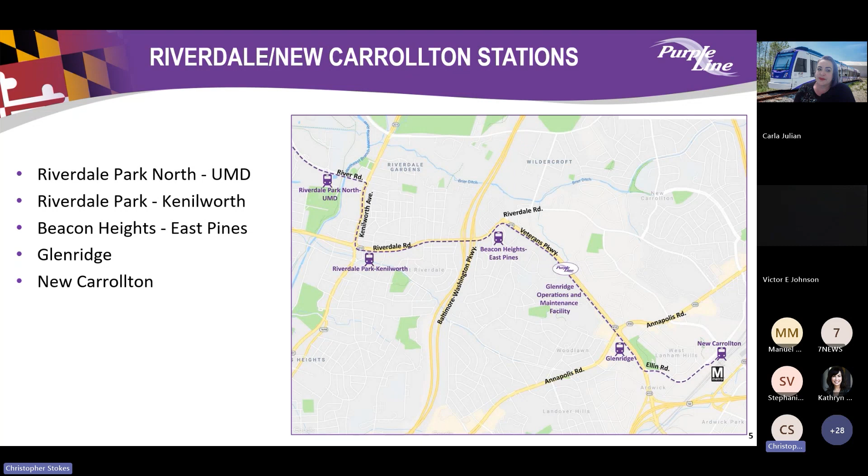So with that 16-mile alignment, each segment is in a different phase. You'll start to see that a few of these segments are at an exciting stage for us right now, with station canopies and track installation going into place.

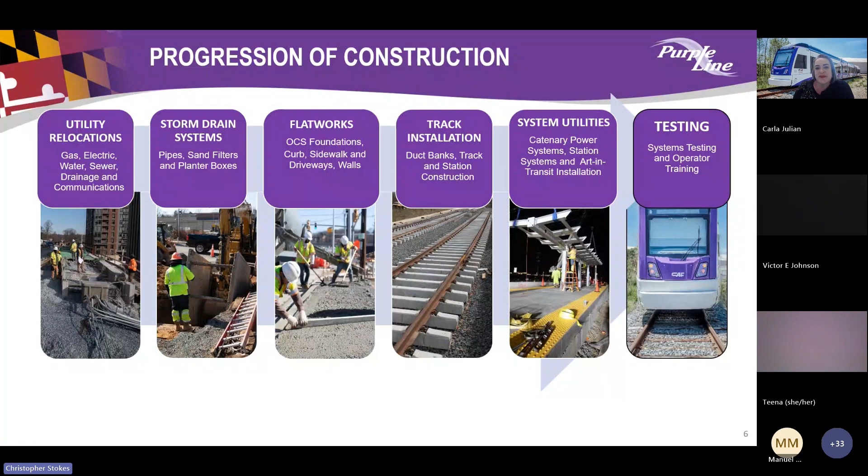Now you're going to see some of that progress as we show you our spring 2024 progress video featuring our project leadership team.

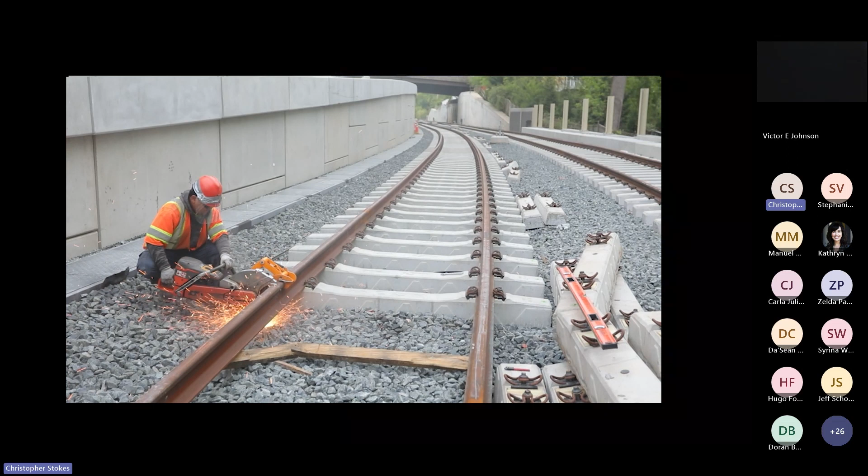Welcome to the latest update on the Purple Line project. This year, we've placed thousands of feet of track, an exciting example of tremendous progress being made by Purple Line crews. 2024 is set to be a year of momentum.

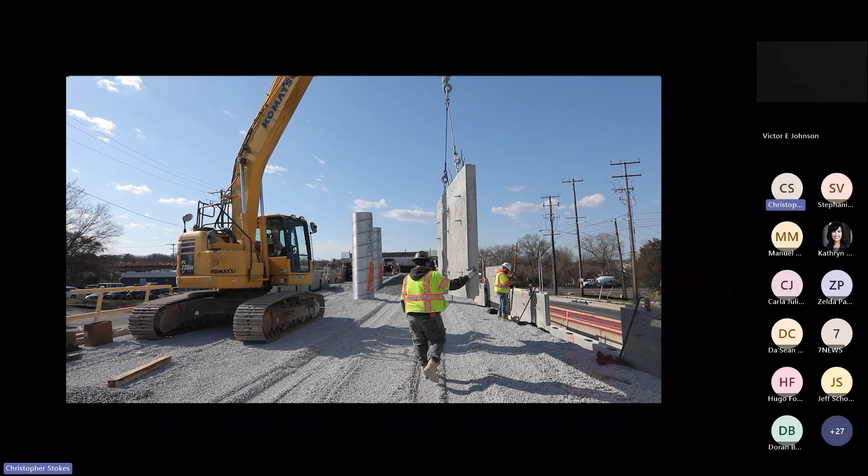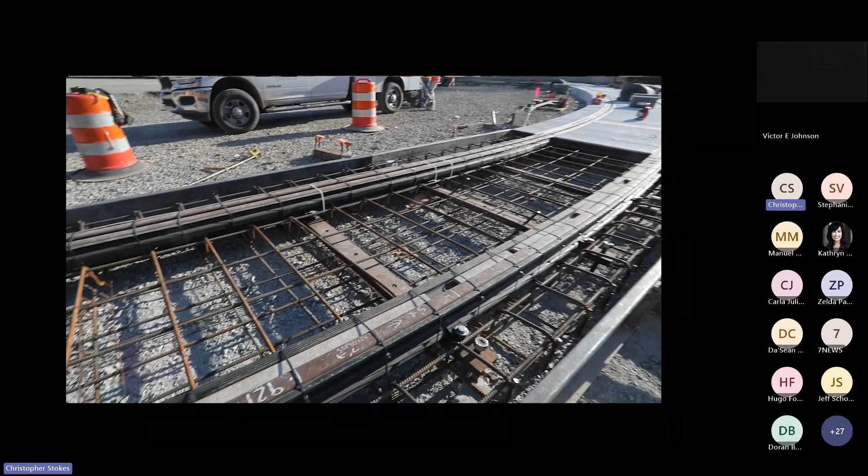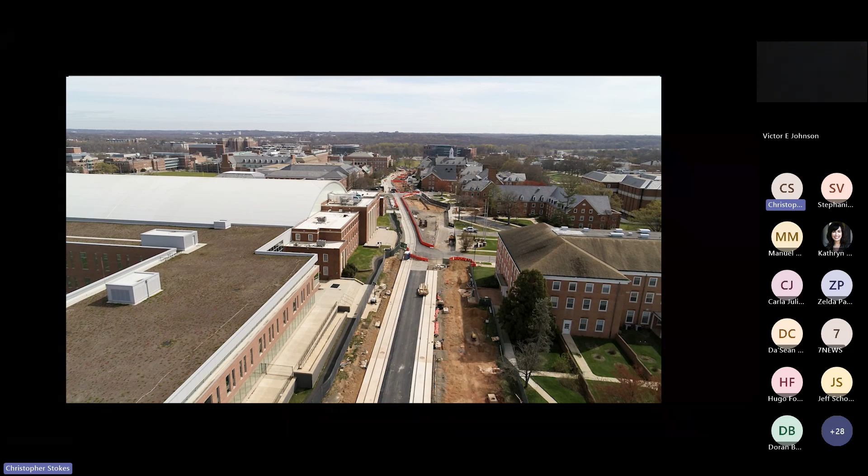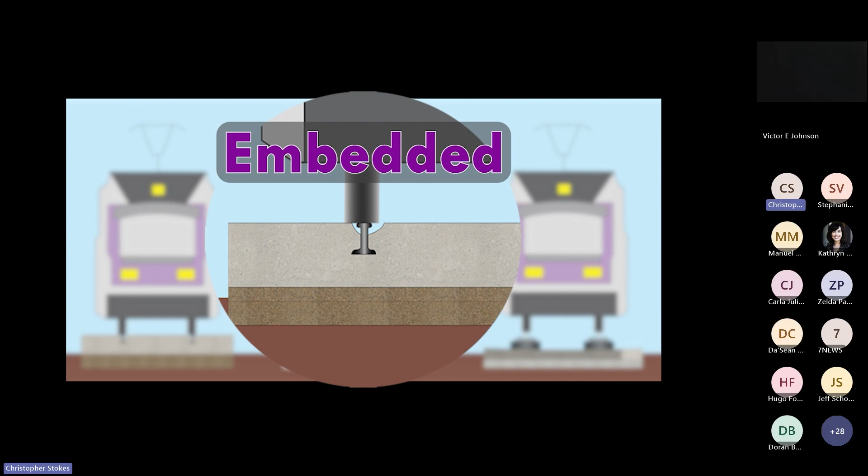The Purple Line track installation teams will be reaching even more areas. Already, tracks have been placed at the southern end of the project, along Ellin Road and Veterans Parkway, and throughout the University of Maryland. The track at Campus Drive is embedded track, seamlessly integrating into the road surface. The Purple Line boasts three main types of tracks: embedded, ballast track, and direct fixation. Each plays a crucial role in our mission to ensure a smooth journey from New Carrollton to Bethesda.

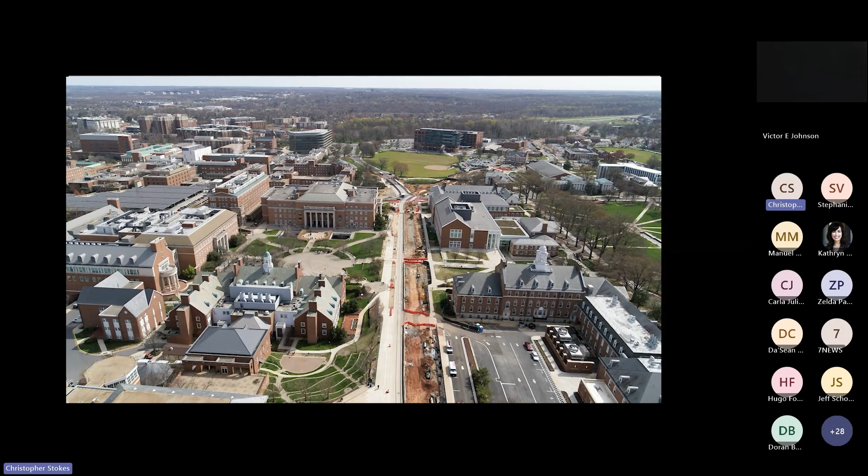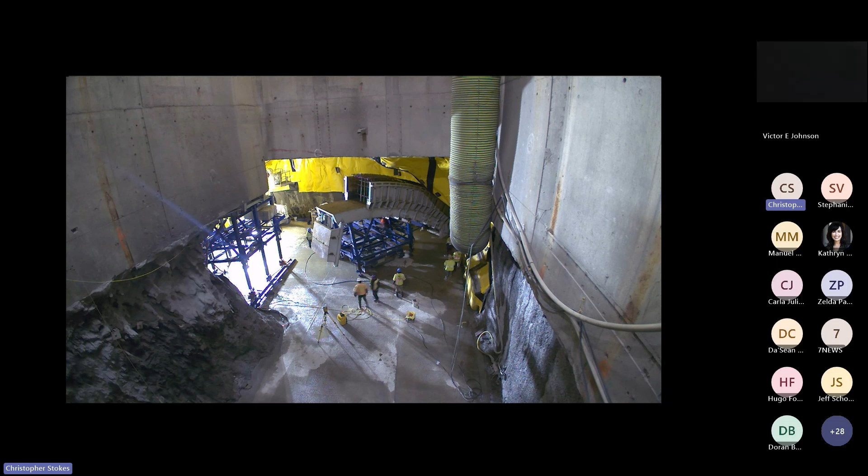Progress is visible along the whole 16-mile alignment. In Bethesda, crews have put the custom-made sprung arch form system to work to cast the first sections of the new cavern ceiling. The cavern will connect the 130-foot deep shaft to Metro's Bethesda station.

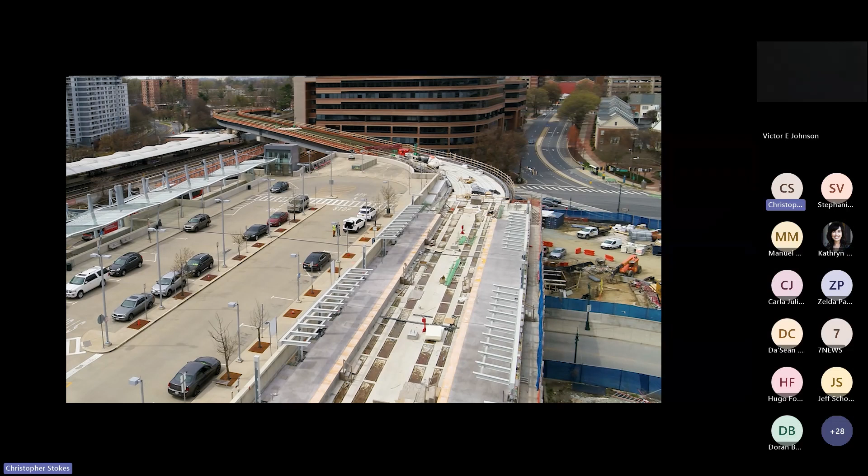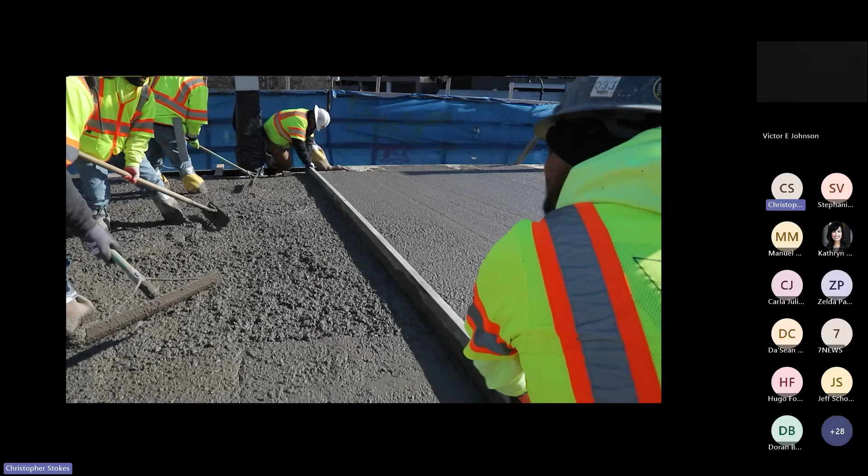In Silver Spring, the new Purple Line station is rapidly taking shape. From the installation of utilities to the erection of canopies, progress is evident at every turn. But Silver Spring is just one of the 14 stations underway. Station platforms are also emerging at key locations like Connecticut Avenue, Lyttonsville, Campus Drive at the University of Maryland, College Park, and Glenridge, among others.

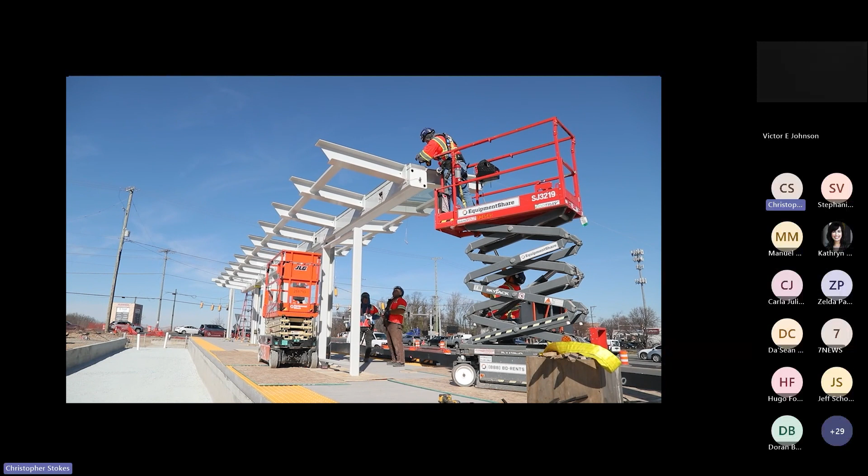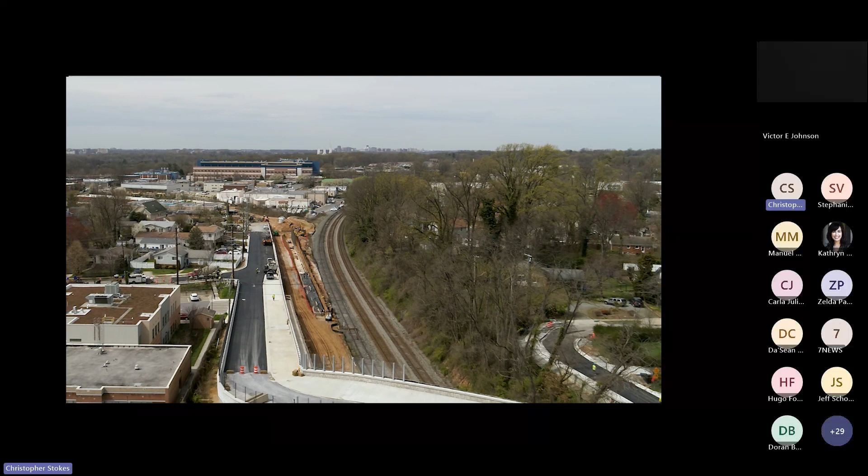In December, crews poured an impressive 720 cubic yards of concrete in one day to form the roof of the tunnel extension between Wayne Avenue and the Manchester Place station. We also finished the concrete, fencing, and paving needed to open the new and improved Talbot Avenue Bridge.

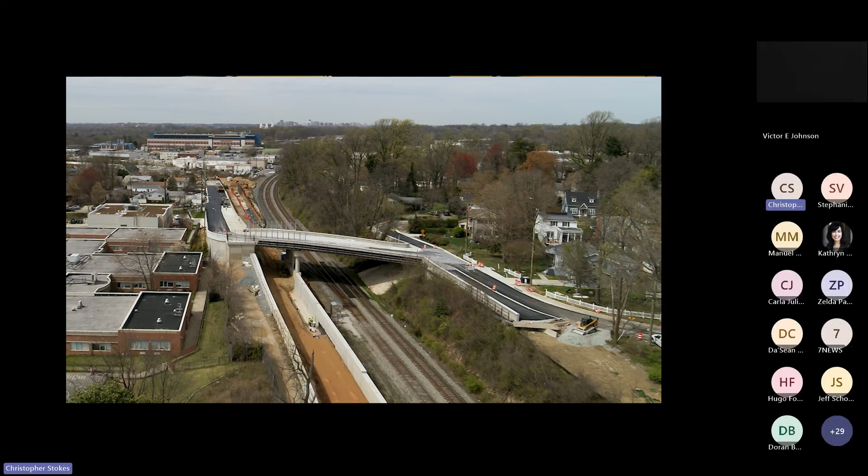This is part of the Capital Crescent Trail and an important connection for the communities of Woodside and Lyttonsville. In Prince George's County, the Kenilworth East-West Highway Flyover Bridge, which is made up of over 617 tons of steel, has been installed over this very busy intersection.

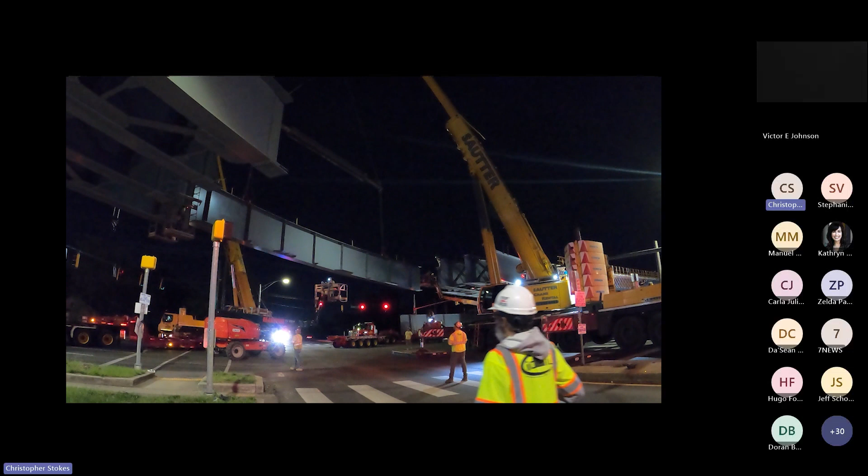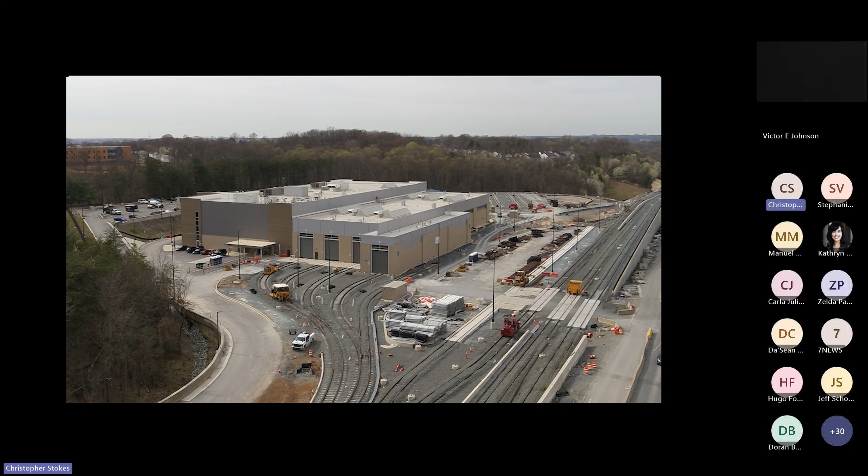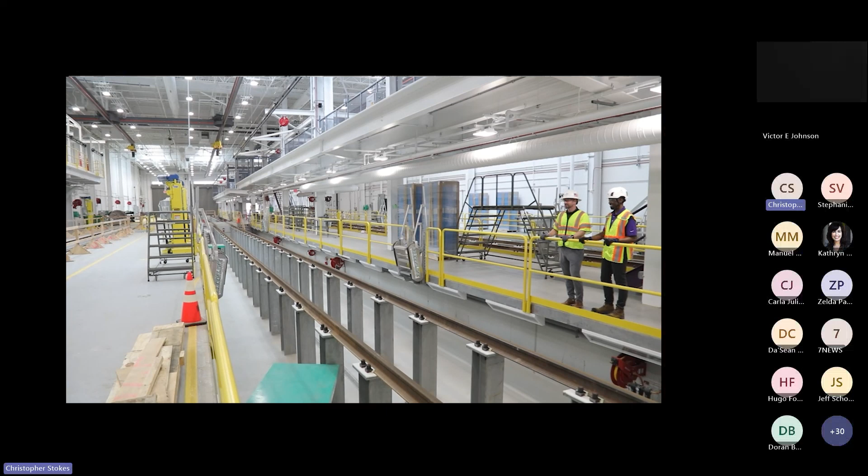In Glenridge, the Operations and Maintenance Facility prepares to be the heart of our operations. Here you'll find a variety of specialty track segments, essential for guiding our light rail vehicles as they navigate through the facility. Inside the OMF, state-of-the-art cranes and meticulously designed workspaces stand ready to handle everything from routine maintenance to major repairs.

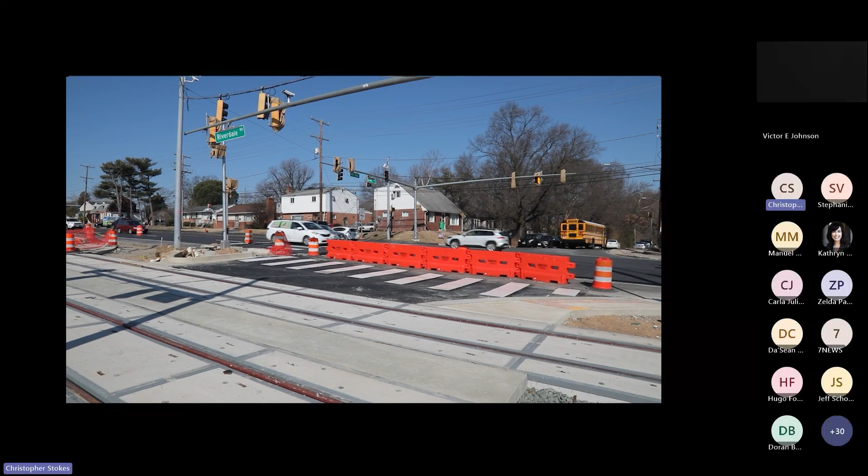While we celebrate these achievements, there is still much work ahead. As you can see, we have more visible tracks, stations taking shape, and complete bridges as a few of the Purple Line's most exciting milestones this year.

This time next year, you can expect to see the Purple Line light rail vehicles begin testing on the new test track located in Prince George's County.

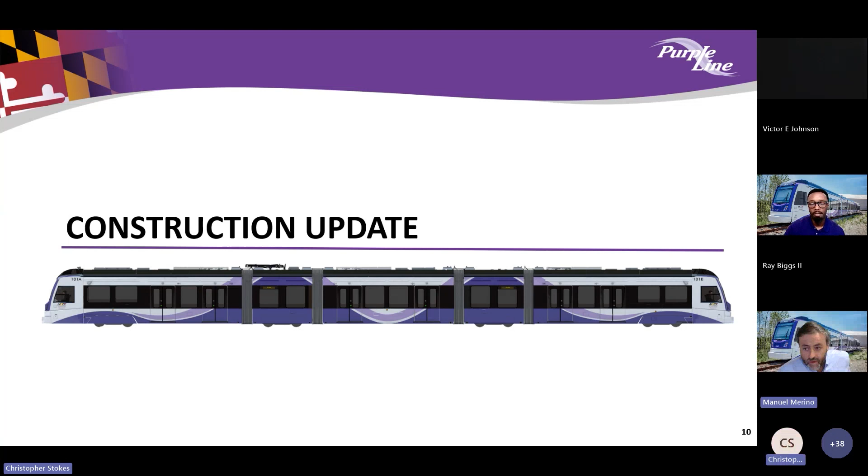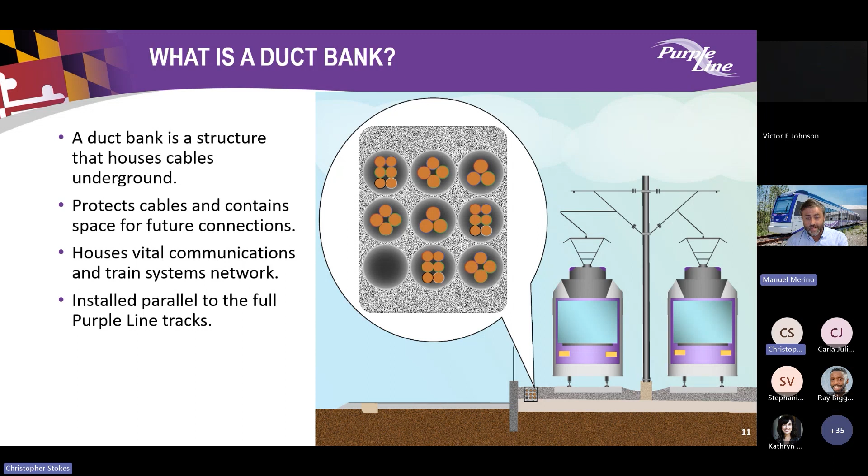We can go to the next slide. We're going to start on the Rivertech Court at River Road. We are working, installing different underground utilities. And what is going to come shortly is an implementation of a full closure during this summer with the intention of the full track installation across Rivertech.

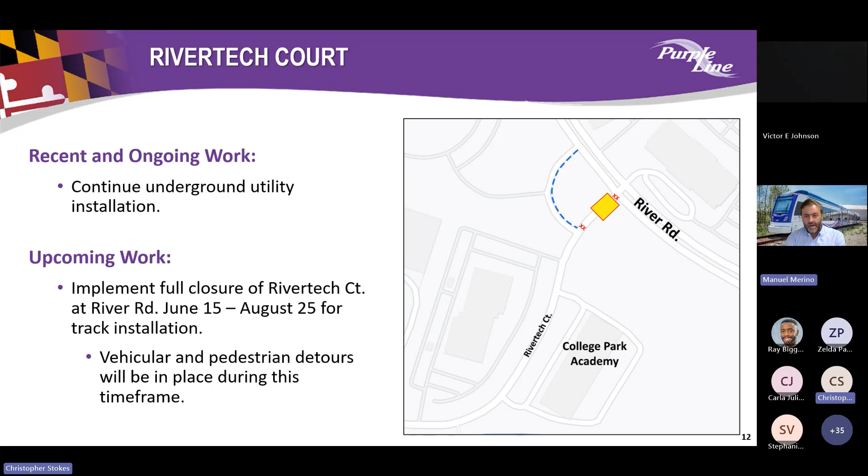And we'll place several detours for vehicles and pedestrians during that time frame. You can see here what will be the detour implemented for vehicles in order to get to Rivertech from River Road and elsewhere.

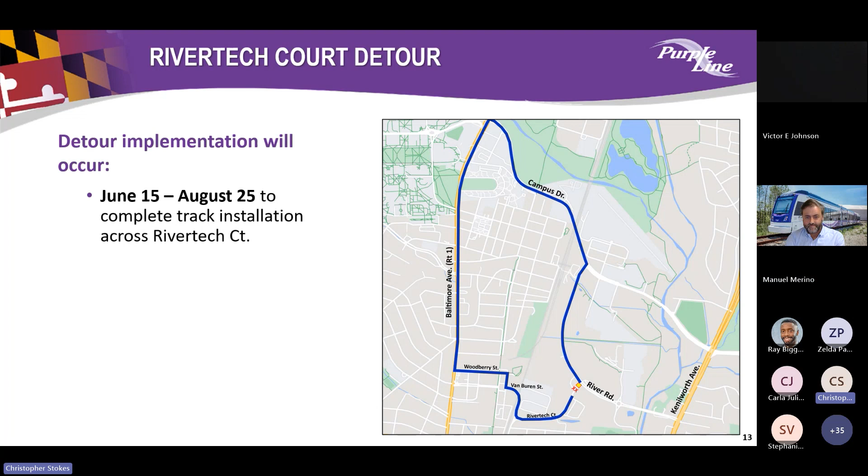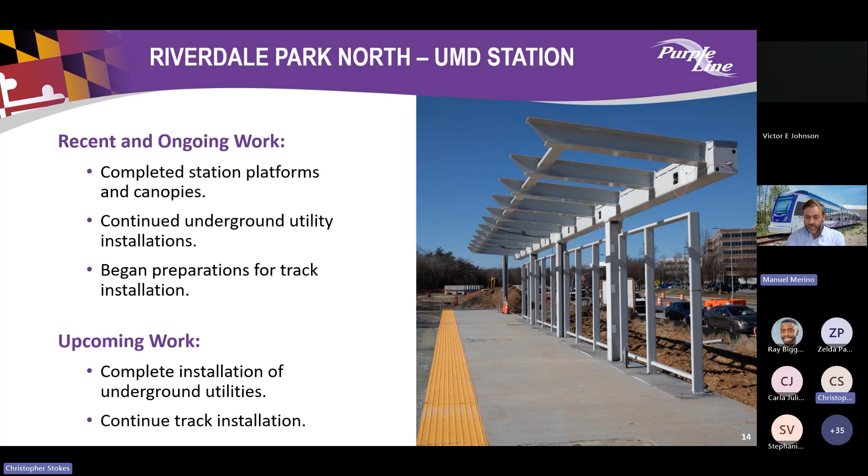Here in the photo, you can see one of the first stations in River Road. It's the Riverdale Park North UMD station. They completed all the station platforms and canopies. We continue on the underground utility installation, and we have started the preparation of the track in front of the platform. The intention of the upcoming work is to finalize and complete the track and complete the installation of the underground utilities around the platform.

On Haig Drive, we completed the track installation during this winter. We removed the traffic circle and temporarily to have the intersection reconfigured, and we have started the utility work in this intersection to be able to install the traffic signals.

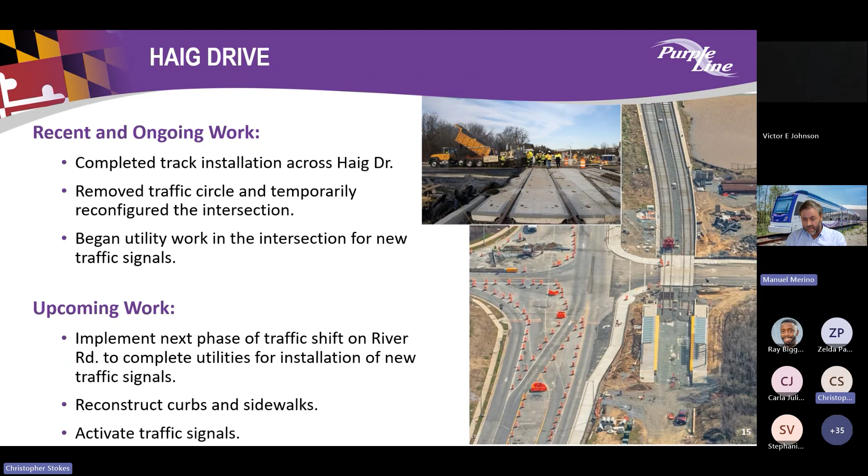What is going to come is the new phase to shift the traffic and complete the utilities on the other side. We are reconstructing the curb and sidewalk, and finally, in 2025, activate the traffic signals.

Taking the turn into Kenilworth Avenue, we have been very busy over the last 6 months. We continue with the underground work along Kenilworth on both sides. We have restored and opened the connection from Kenilworth to Quintana Street.

During the upcoming work, we are planning an alternate route through the Dollar Tree Shopping Center from Quesada for the installation of a massive underground sand filter in the parking lot, complete the underground utilities, complete the curb and sidewalk along the east side of Kenilworth, and we'll be doing traffic switches to the southbound lane to try to span the center lane work and start working on the middle.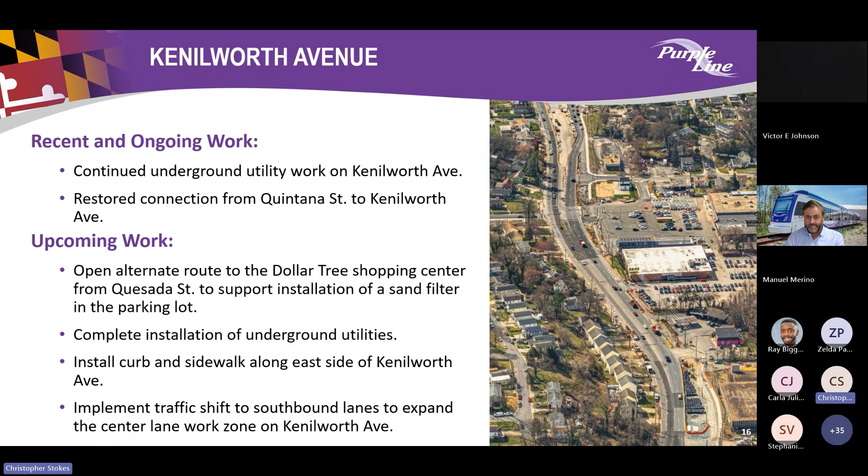As a major milestone for us, everybody has seen over the last weeks how this has been developing. We completed the piers, we completed the caps, we have recently completed the installation of the steel girders that fly over the intersection. At the same time, we are also doing the construction of the MSE wall and the deck work that is still ongoing right now.

Over the next months, the flyover construction is going to continue. We'll be completing the ramp on the Kenilworth side, and we are going to get ready to receive track after that.

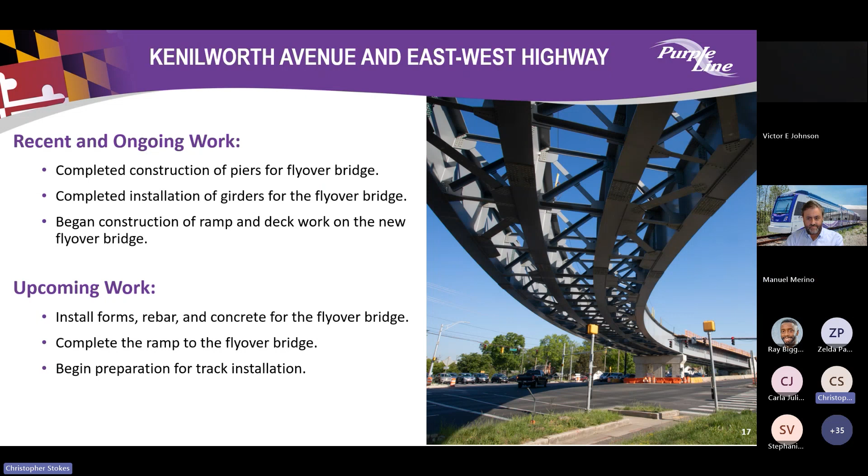This is a snapshot of the detour implementation that is ongoing most of the nights over the last month to facilitate us being able to install the massive girders, and it will continue to be in place for the installation of the different elements on the superstructure and the deck until we complete it close to the summer.

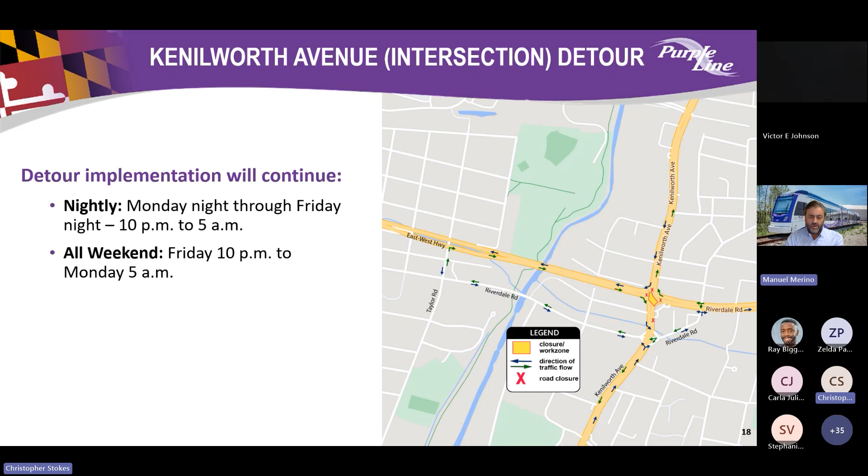On Riverdale Park, Kenilworth Station, above the ground, we continue doing big progress. We have completed the placement of the station itself. We have started with the station utilities, placement of platforms, and we also started the foundation and the walls of the elevator and the stairs.

Over the next month, we do expect to be able to install the canopies, continue with the construction of the station, and obviously the construction of the elevator and the stairs, which are going to start very soon.

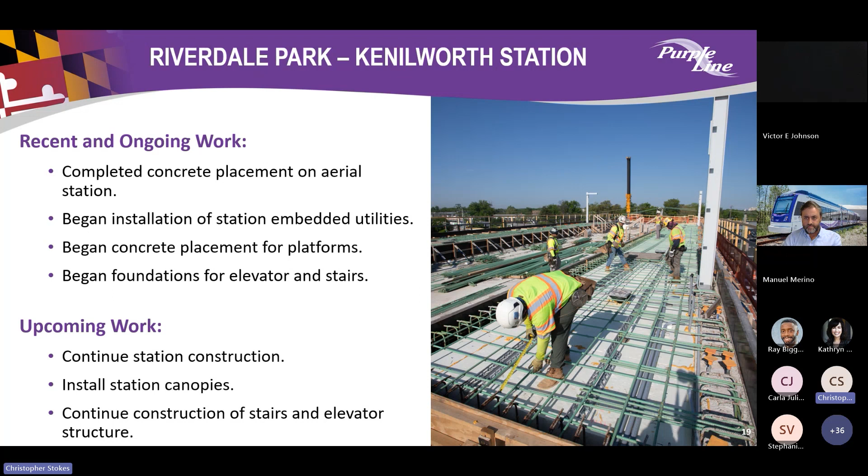On Riverdale Road, we have completed the underground relocation. We have installed the ballast curb along the majority of the alignment in that area, and we continue with the replacement and construction of the permanent curb and sidewalk.

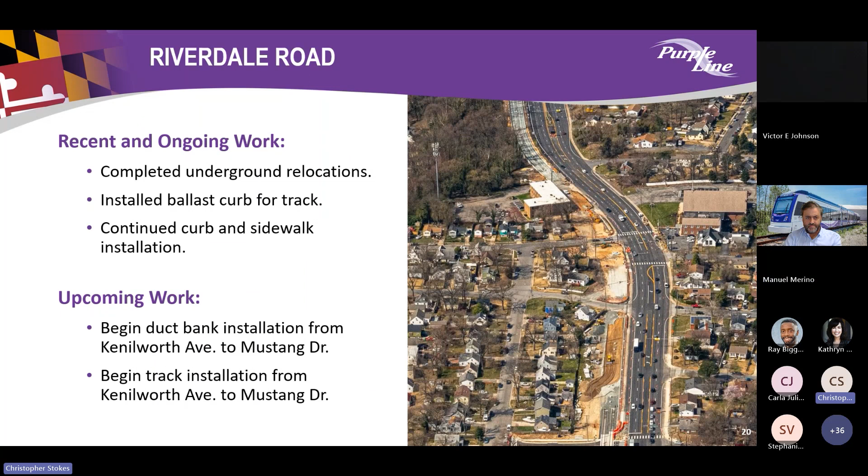On the upcoming work, we are going to continue with the duct bank installation across Mustang Drive, and once we finish that, we will do the installation of the track to cross Mustang Drive, and after that we will be able to reopen. On Riverdale Road, from Mustang Drive to Eastpine, we have completed the construction of 64th Avenue, which has been opened today.

Temporarily Mustang Drive is closed, but over the next days, next week, we will start reconfiguring and we'll be closing that.

Now we will be ready to finish the reconstruction of the new Mustang Drive connection, and like I mentioned before, continue with the duct bank installation and preparation of the track.

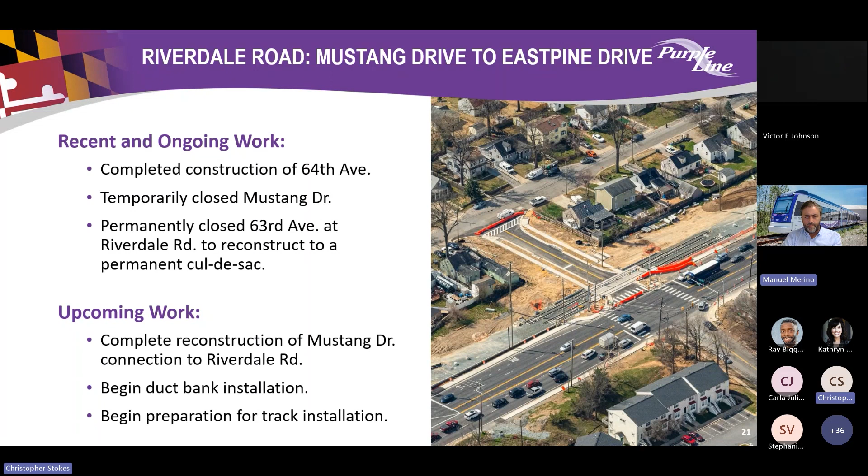This is the new reconfigured Riverdale connection. This is how it's going to be at the end when we have everything completed. 63rd and Eastpine will become 2 cul-de-sacs, and there will be 2 signalized intersections at 64th and Mustang Drive to give access to the neighborhood from Riverdale Road.

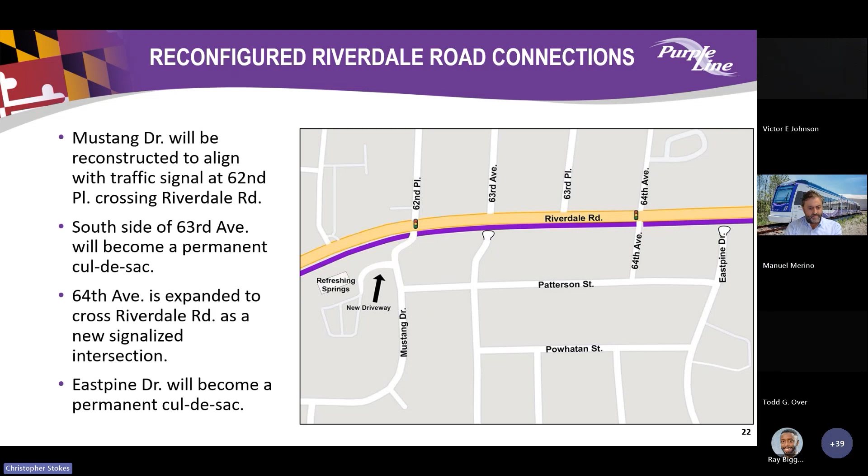East of Baltimore-Washington Parkway, we have Beacon Heights East Pine Station. We have completed the platform, we installed the canopy, and we are in progress of the installation of the utilities as well as the work adjacent to the station.

Over the next months, we're going to continue with the installation of the station, complete the utilities, and also complete the wall on that side of the road.

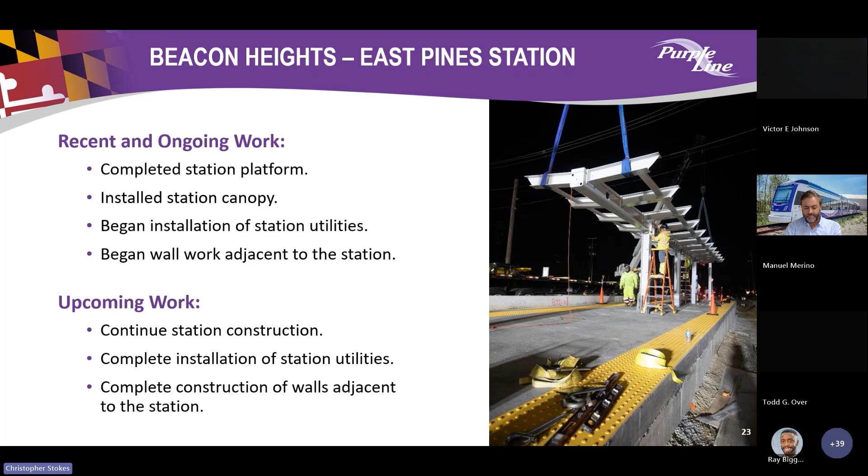Close to Beacon Heights on 67th, we continue with the underground and overhead utility relocation. Close by, we will be doing a temporary traffic switch to the north side of Riverdale Road. That will allow us to complete the station and the track on the south side. We're going to start preparing the 67th Avenue track installation as a crossing, and ultimately we'll proceed with the permanent closure of 67th Place to reconstruct it as a cul-de-sac.

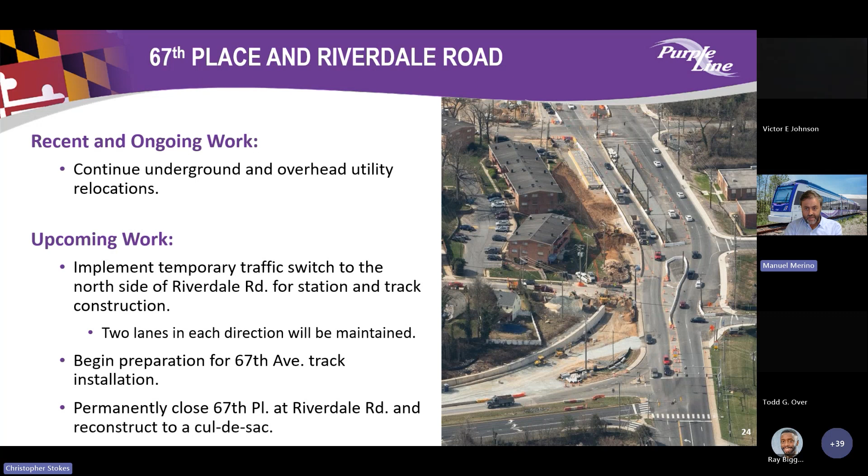Through Veterans Parkway, we have been doing massive work over the last month. We have one of our stormwater management facilities, POI 140. We started construction of the facility, and over the next month we are going to complete the same, install the storm drain connection across Veterans, and finally do the reconstruction of the outfall on the east side of Veterans Parkway.

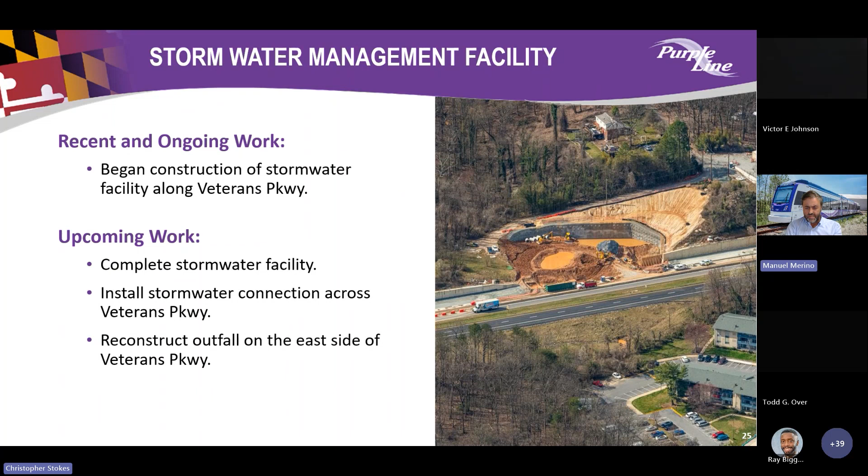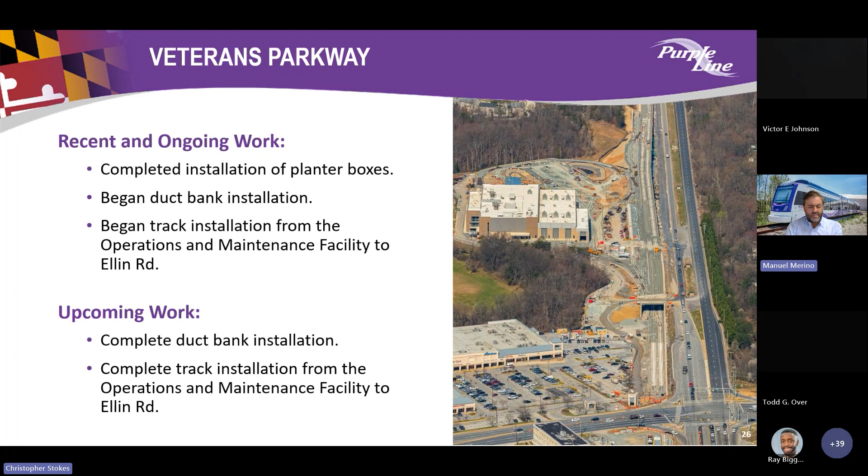In Veterans Parkway, we have completed the full installation of the planter boxes, began the duct bank installation, and we have started the installation of the track for the operation and maintenance facility till Ellin Road, as you can see. Over the next months, we're going to continue with the duct bank installations across Annapolis, and we will complete the track installation in the operation and maintenance facility also.

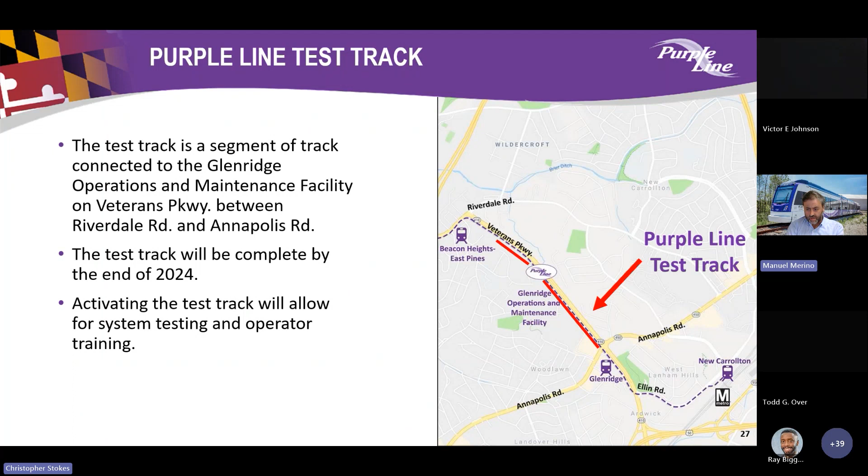At our Glenridge operation and maintenance facility, we have continued with the stormwater management facility installation. We have started the specialty track installation of track power systems, the TPSS and the OCS, and we are preparing the yard for the delivery of the light rail vehicles.

In the coming months, we will begin the installation of the lighting system, complete the overhead catenary power system, and begin the testing and conditioning phase.

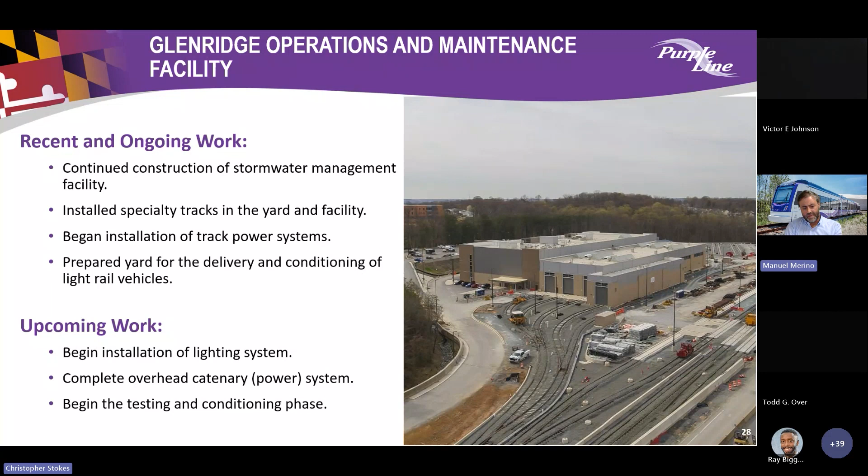On Annapolis Road, we have recently implemented a signal modification to start the first of several traffic switches that will allow us to go from one side of the road to another. Over the next month, the track installation through Annapolis Road will be completed, and we are also going to start the installation of the catenary poles and wires for the light rail system.

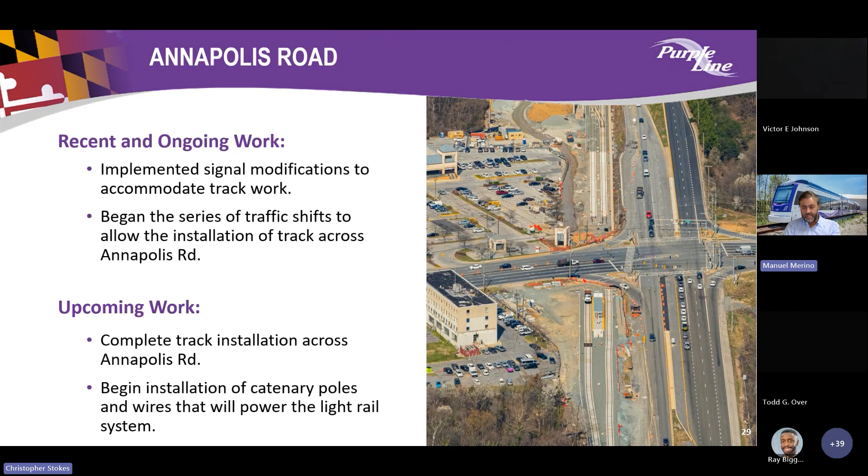On Glenridge Station, we have completed the foundation work and the platform. We continue with installation of the utilities, and we have completed the track installation that goes through it. We're going to start with the catenary poles and wires that will be connecting to the OMF facility center.

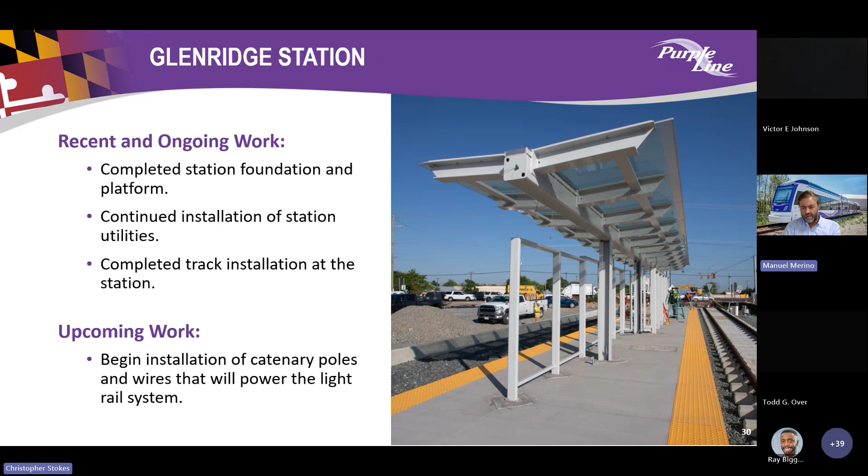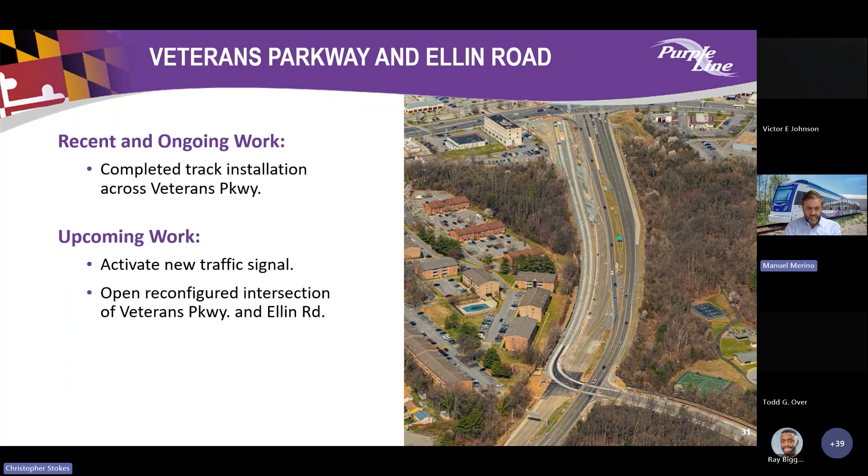Ellin Road, we have been also very busy working over here. We installed the eastbound track from Hanson up to Emerson Place, including the crossing of Hanson. We have also begun the installation of the light poles along the alignment.

Over the next month, we are going to continue the track installation along Ellin Road, and we will implement the traffic shift to reopen Ellin Road to Veterans Parkway. That will allow us to close Ellin Road between Hanson Oaks and Emerson, so the track on the north side can be completed too.

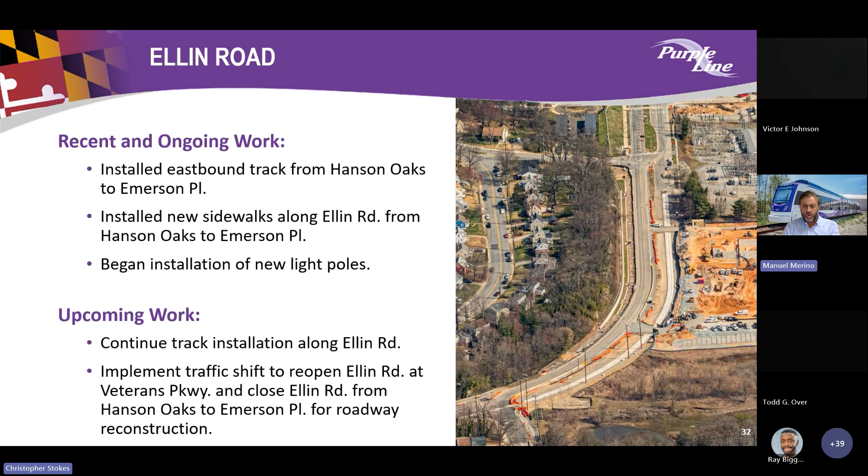Over the next months, we'll also start the construction of the new kiss and ride facility, as well as the new bus loop.

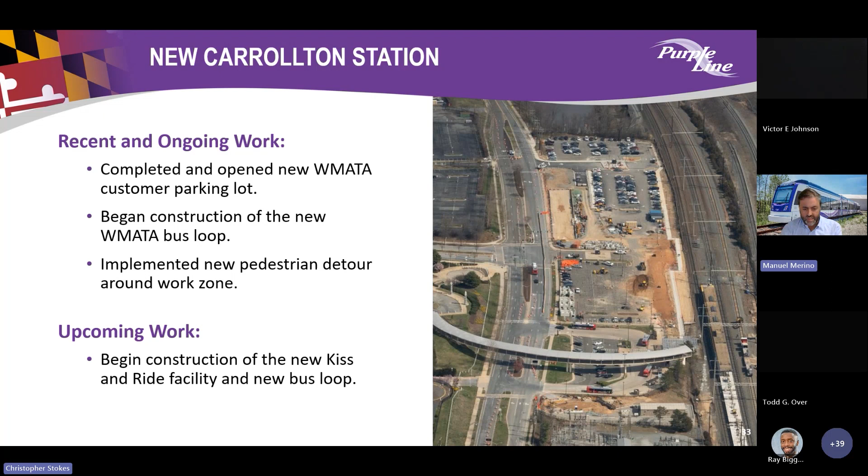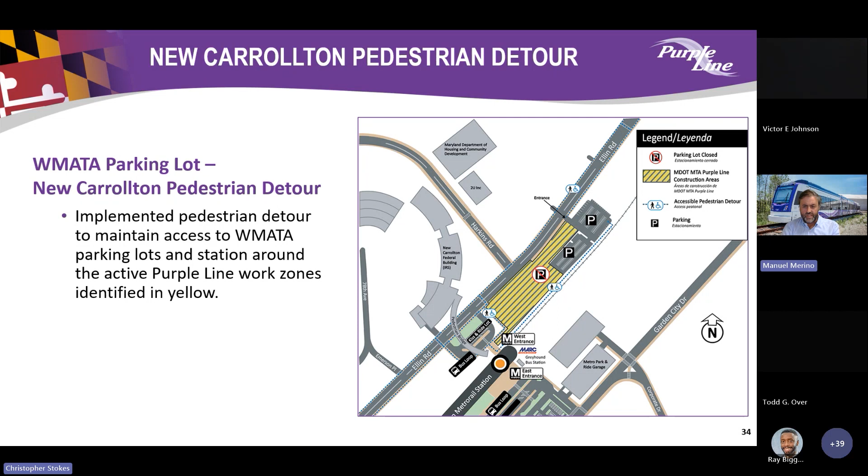This is a sketch of the pedestrian detour that is in place and implemented already between the WMATA station and Amtrak station, to facilitate access to the new eastern lot parking facility.

And I will pass to Safety.

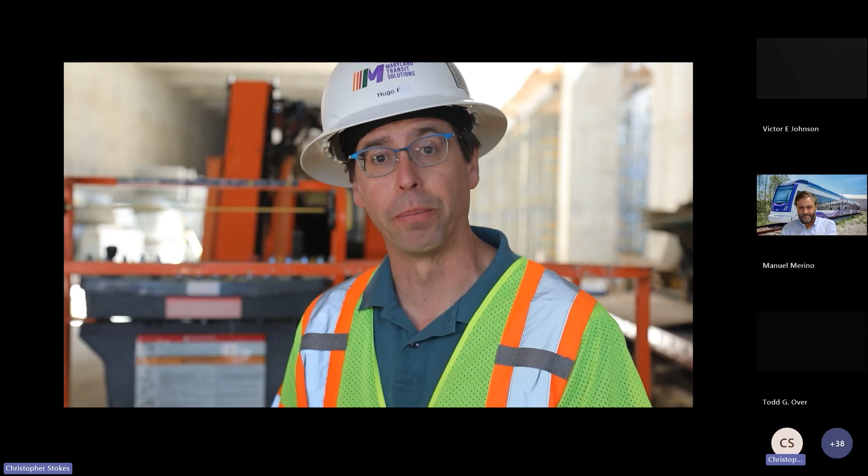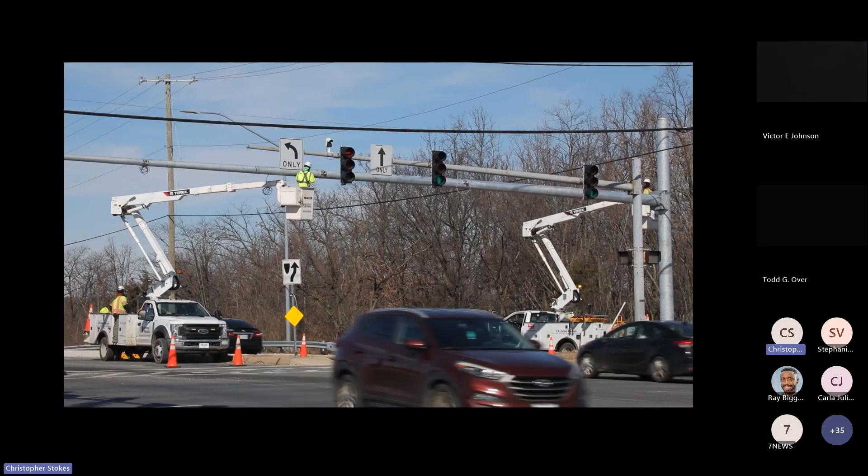Safety is our number one priority, both for our crews building the Purple Line and for the public. As we shift into track installation, you will see more and more work in the roadways, and crews implementing lane shifts and detours. This could also include pedestrian walkways. So please take your time and follow all the posted signage, and if you see something amiss, please call our hotline.

Thank you, Manuel, for sharing all that progress tonight. I'd like to talk a little bit about community engagement. The Purple Line team is so fortunate to be part of the community, and we also take that responsibility seriously. You may see us out at local events providing information, such as a farmer's market or UMD's Maryland Day.

Tonight we wanted to take the opportunity to once again advertise our community grant program. This program is aimed at supporting existing nonprofit groups by amplifying the great work they're already doing for our community. Our last round of 6 community grants actually had 2 recipients based in Riverdale, the Metamorphosis Community Project and Witati Academy. So tonight we're reminding you there's a May 31st deadline for the next round of 6 community grants, so please spread the word.